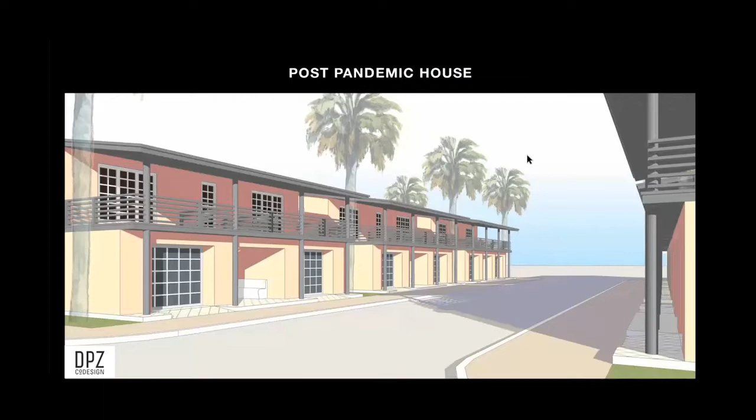Now, this is a generic aesthetic. This is an aesthetic that I think is both modern and traditional, and it could have happened in most of the Sun Belt. And frankly, these ideas are warm weather ideas, as you can see by the palm trees. So these are the houses. This is a generalized house that we've designed. This is a floor plan that looks different than most.

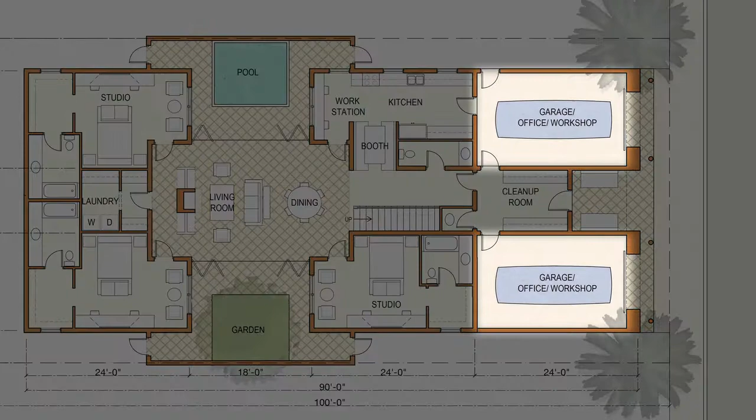First, the street is on the right. You see that the garages are split, and the garages are much bigger than necessary. And what's envisioned is that one or both can be transformed into an office. We think that actually the garage, instead of being the back of the house, is a very good candidate for being the front of the house as a workplace, because it's really like a loft.

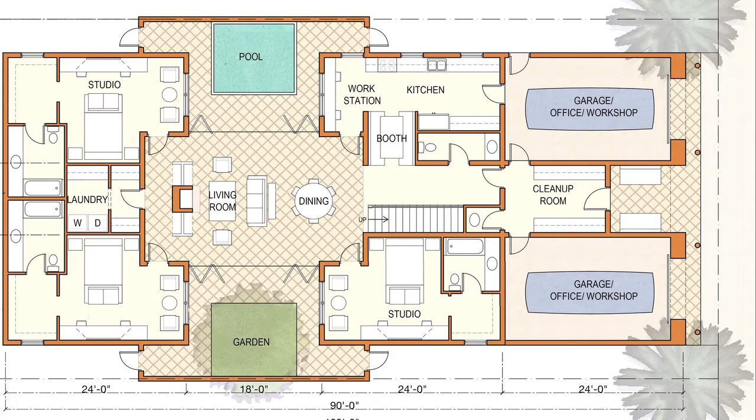And what we found is that working in the kitchen or working on the dining room table and so forth is not all as cracked up to be. But the garage has potential, so we made them larger. We gave them a tall ceiling. We gave them a great garage door, and they're wider. And we also split them so you can convert one and not the other. You know, when you have a two-car garage, you have to convert both. So that's the first thing that's different.

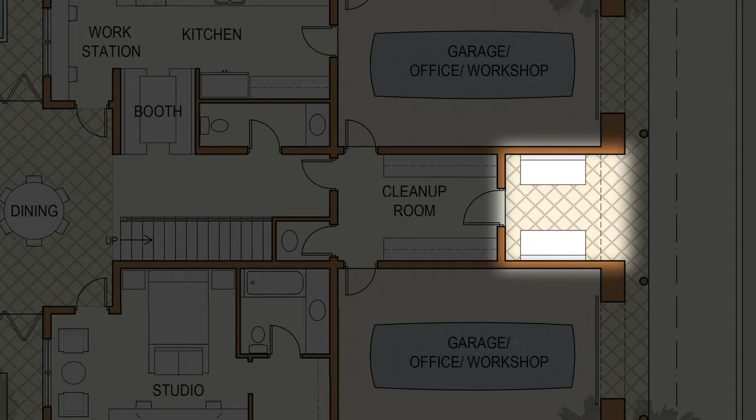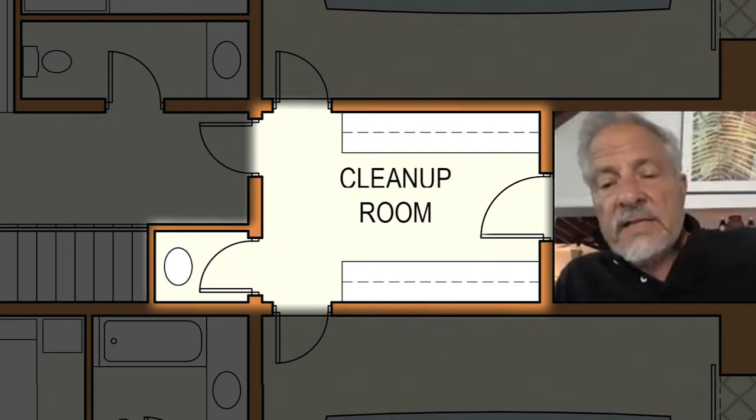The second one is that between the garages, there's a place where you wait outdoors. So you don't necessarily bring people into your house, but you can still sit down and have a conversation. And that's what you're seeing, these two benches facing each other, which, by the way, they do have ventilation, which I'll show you later. Then the vestibule has to be taken seriously because it's a cleanup room. This is where you leave things behind and wash your hands. And in this case, it would have a UV light, to clean up, which disinfects things. But frankly, why not have a really decently designed, serious vestibule where you can leave a lot of stuff behind and wash your hands? And by the way, you enter from the garage through that vestibule.

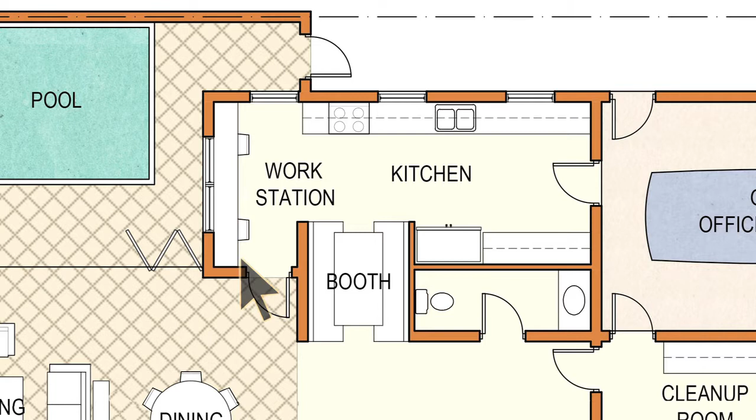Then you enter the dwelling, and there's a kitchen to the right, and that kitchen is like other kitchens, except that it has workstations. Okay, so that's the kitchen now.

Before I go into the living room, let me show you that we actually split the bedrooms into the different corners. You see them here, 1, 2, 3. They're not along a corridor. When you have all your bedrooms along a corridor, you're too social. You don't have that feeling of isolation that you should have when you're locked in, when you're locked down.

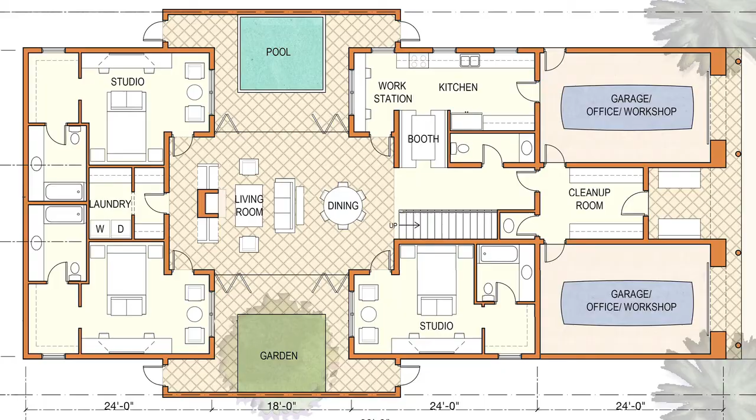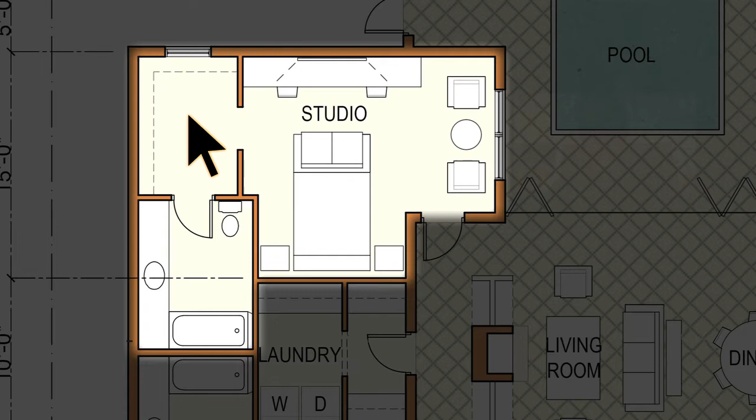So these bedrooms were carefully designed to be like studio apartments. As you can see, you enter. There are places to sit by the window. There's a serious place to watch television. There's a serious place to work. Of course, there's the bed. There's an enormous closet for all your storage. You don't share the storage with anybody else, and a quite large bathroom. So this is a bedroom, but it is a bedroom that's like a studio apartment.

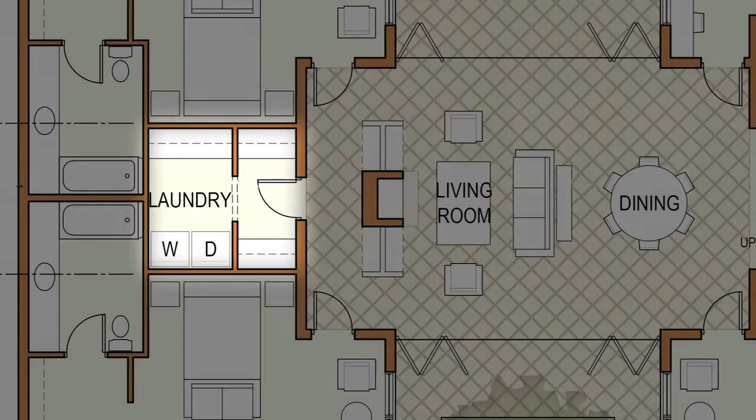Here's the other bedroom, and then there's the third bedroom here. This one, of course, could be convertible to something else. Of course, there's a laundry, etc. But it's a psychological distancing that's important with these bedrooms.

Right in the middle of the house is a living room and a dining room. This is a courtyard house, but instead of having the courtyard in the middle, the living room is between two spaces - one labeled as a pool and the other as a garden.

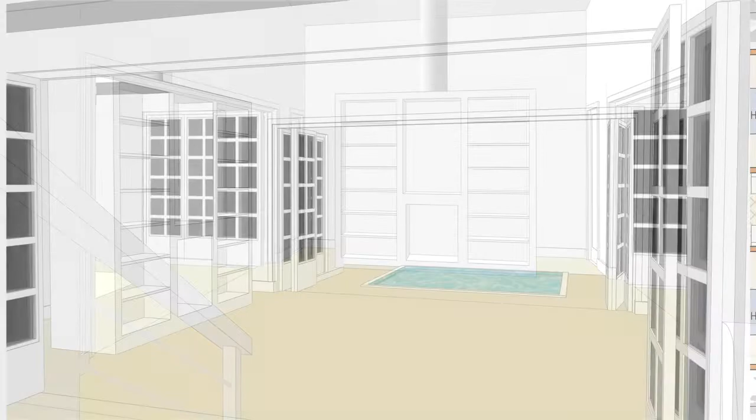When you open the doors, very substantially - these are window walls you just move right out of the way - you get a space that's a full 50 feet wide. It's almost like being outdoors from one side to the other, and the paving is shared, so it feels not only very large, but because it has openings on both sides, you get a lot of cross ventilation.

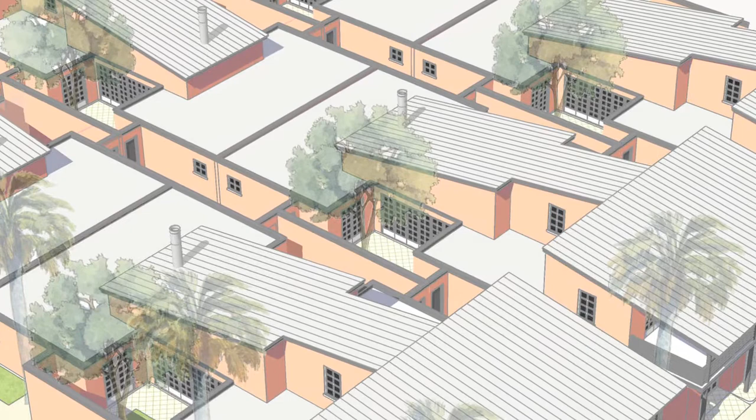We're envisioning that people are going to really begin enjoying outdoor space, which is private. Notice there's no yard in the back or on the sides in this house - that's a waste, because if you're really going to live with your space, you need privacy. By the way, this very large space occurs in a standard 50 by 100 foot lot.

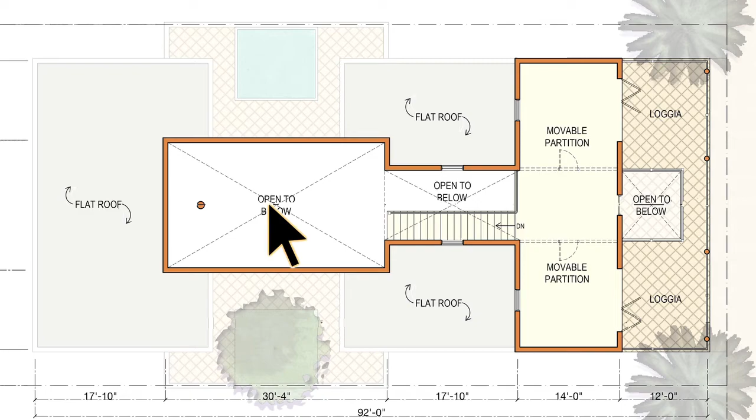So then we take the stairs up. By the way, you should know that this space is quite high - it's a tall space. We take the stairs up, and here we are - that's the double height space, which feels like an outdoors between the two courtyards.

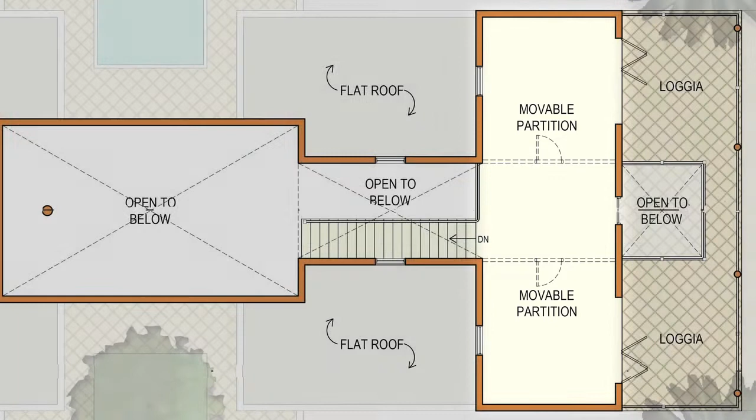You take the stairs up, and there's a large unassigned room with movable partitions, and that's where you actually make the places that you need. You could have a caregiver apartment, an isolation bedroom, a gym, a workplace, a dog run, or homeschooling.

I think it's important to have a space which is separated from the others, that you can actually program according to your needs. And the needs are becoming ever more complex for the houses. Notice too that there's a lot of outdoor space here in front of it.

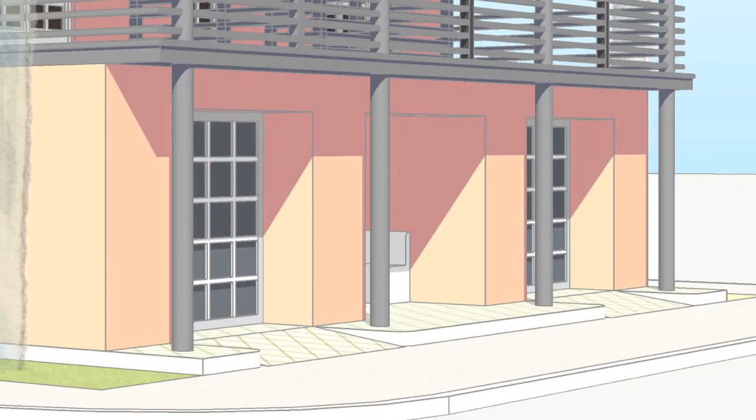Now this veranda, so-called veranda, is not a porch on the first floor, it's above. The porch on the first floor is too sociable - you're right there with the passerby. You want to actually look at the street, socialize with the street, provide activity to the street, but I think it's better if it's upstairs.

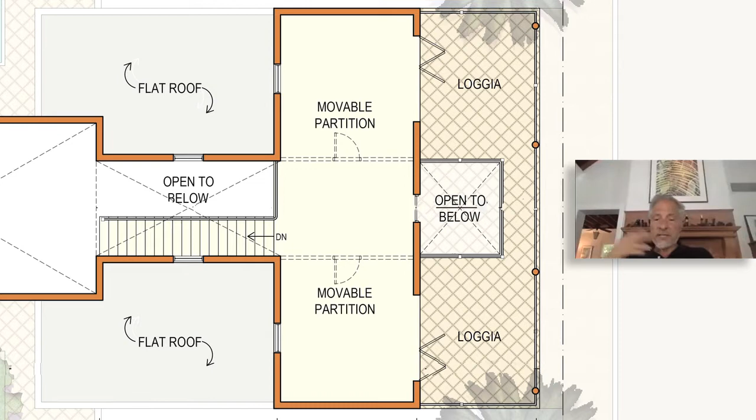One of the things we might talk about - if there's any social instability, the street at certain times of night sometimes gets dangerous - the first floor is pretty hermetic, but the second floor is actually quite safe. So that's the veranda. I've spent all my life putting porches on the first floor, but in this case, the porch is on the second floor, called the veranda.

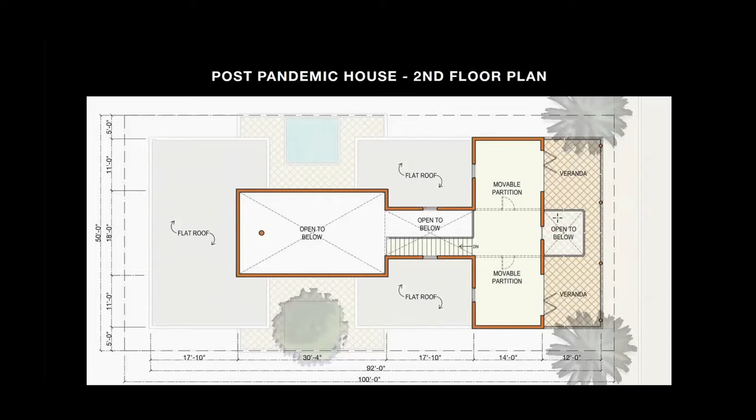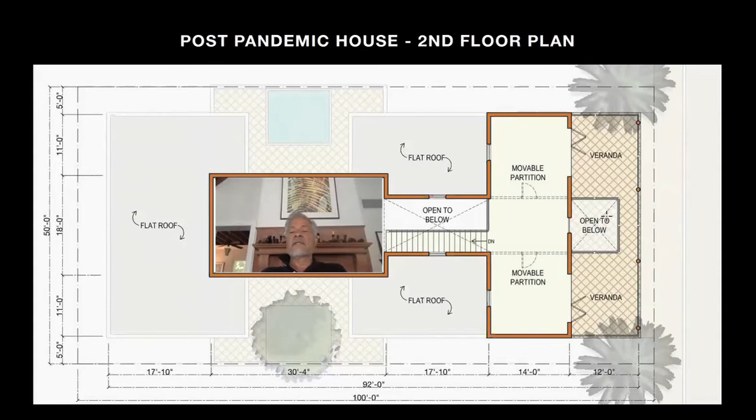And this void open to below is there to provide the cross ventilation. It's above this space, and it's there to provide the cross ventilation that actually makes it safe to be outdoors. As you know, there are controversies about masks, controversies about vaccines. The only thing there's no controversy about whatsoever is that being outdoors in the fresh air is good for you, and that sunlight with vitamin D is good for you. This house is all about that.

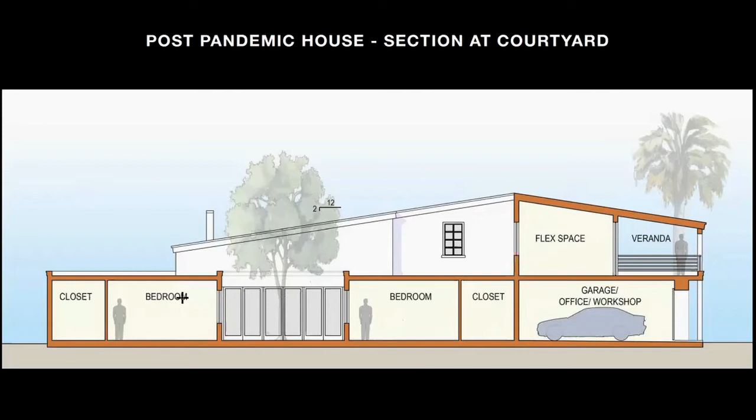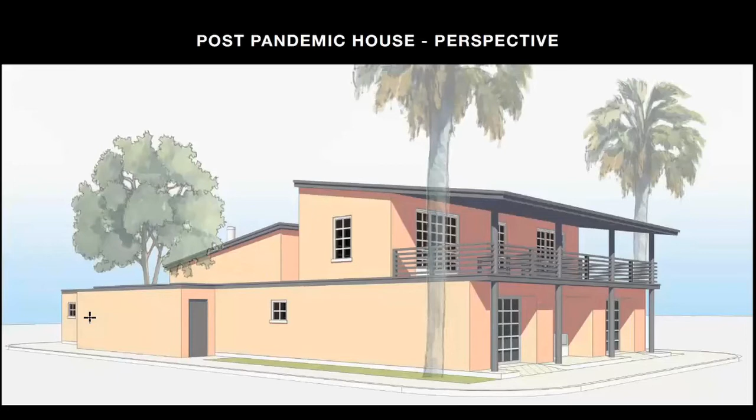They don't have to be this style - I'm not showing them to you, but we've done them in different styles. This is sort of the base case. This is made out of block and stucco and steel columns with steel railings.

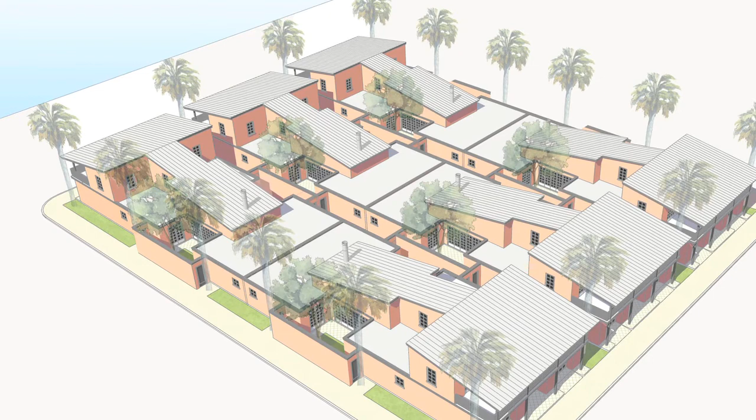Pretty easy to do. And here they sit, 6 of them on 2 opposite streets. And you can see that they waste no space whatsoever - it's a 50-foot lot, and there's quite a complex little society that you can work with there.